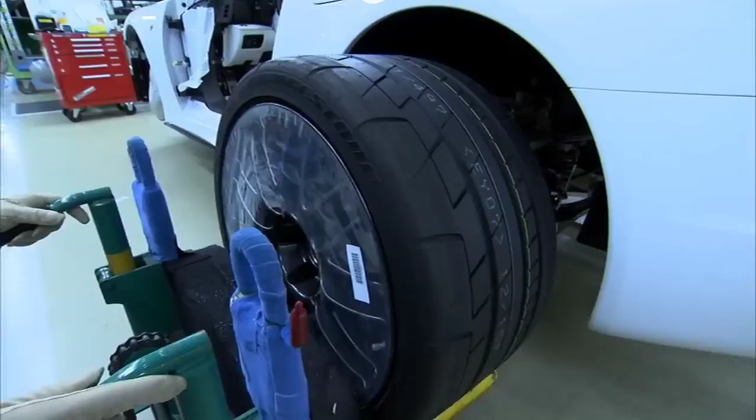Inside this top-secret megafactory, a car like no other is taking shape. Craftsmen hand-build what they consider an automotive work of art. Money is no object. This machine must redefine a billion-dollar brand. Failure, not an option.

Japanese marque Lexus sells itself on luxury, marketing its cars as elegant, quiet, high-tech, and efficient. Now, a different kind of car wears the Lexus badge, the LFA. Aggressive, loud, agile. Highest revving V10 engine in a production car. 325 kilometers per hour. A car like nothing Lexus has ever produced before.

Lexus is just over 20 years old. The world's largest car maker, Toyota, created the brand to compete with other high-flying luxury marques, Mercedes-Benz, BMW, and Jaguar. It's worked. Lexus is now one of the biggest-selling high-end marques in the United States. But now, Lexus is out to inject more excitement into their brand. Chief engineer Tanahashi Haruhiko is the man behind this vision.

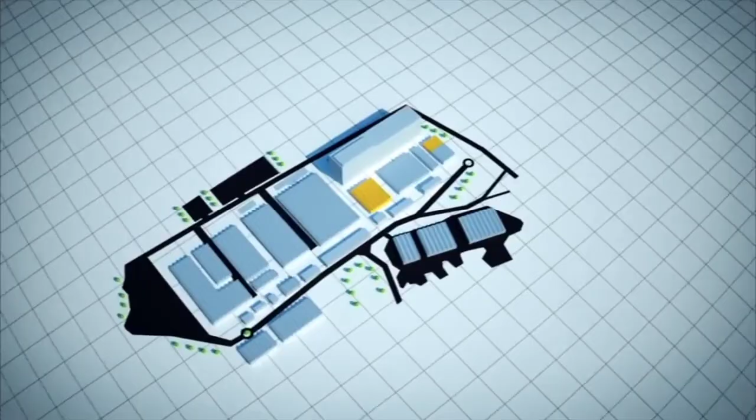Finding a factory in Japan isn't hard when you're part of the country's largest company. Toyota is so big, they even have their own city, Toyota City. Of the company's 15 Japanese factories, 10 are found in the city or close by. Among them, the Motomachi assembly plant. The company transformed two unassuming blocks of this megafactory to create the LFA. They then scoured Toyota's 50,000 Japanese workforce to handpick just 175.

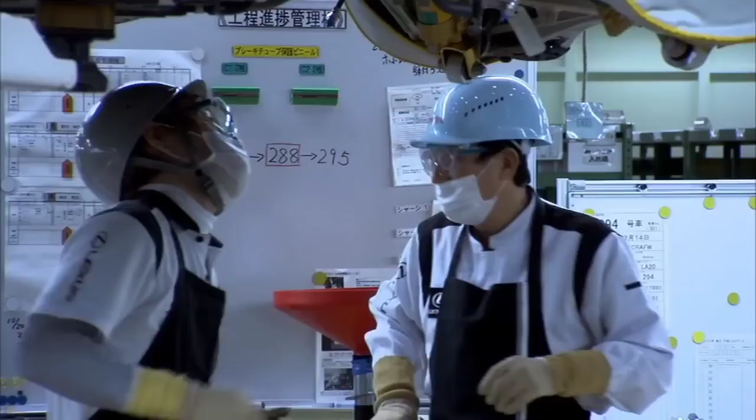All the associates here at the LFA Works feel they are artisans, not just operators. These artisans are known as takumi, Japanese for craftsmen. A status only conferred on the most highly trained, skilled workers. Each and every associate at the LFA Works is seeking to achieve perfection, taking this challenge on with a sort of samurai spirit.

Yamanaka Shigeru is manager of the LFA Works. His teamwork credentials come from another time-honored Japanese tradition: baseball. Before this, I was working as manager of the Toyota Motor Corporation baseball team, which brought people together from lots of different factories. It was because I could manage that organization that I was made manager here.

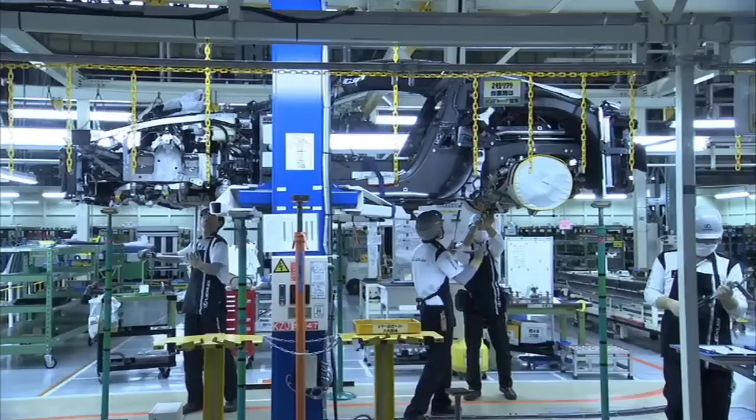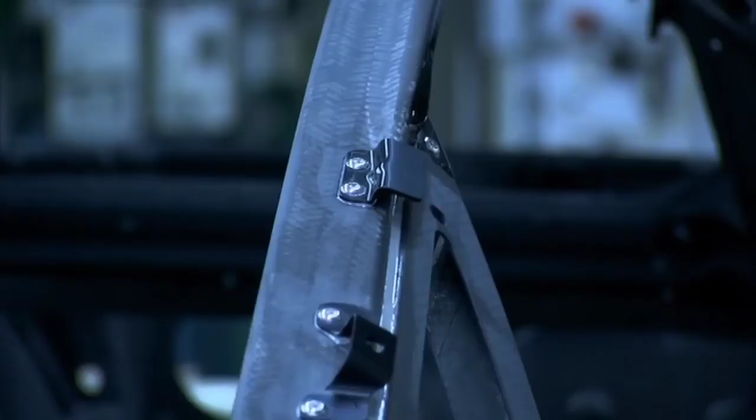To reach their goal, this tight-knit team utilized sophisticated tools and materials to build their car. The most important of these is carbon fiber composite. Carbon is crucial to the car's performance. It's a material 5 times the strength of steel, yet a quarter lighter. It's the construction material of choice for both Formula One racing cars and the aerospace industry. The company even make their own carbon fiber here on site. Up until now, no television cameras have ever been allowed inside this top-secret facility.

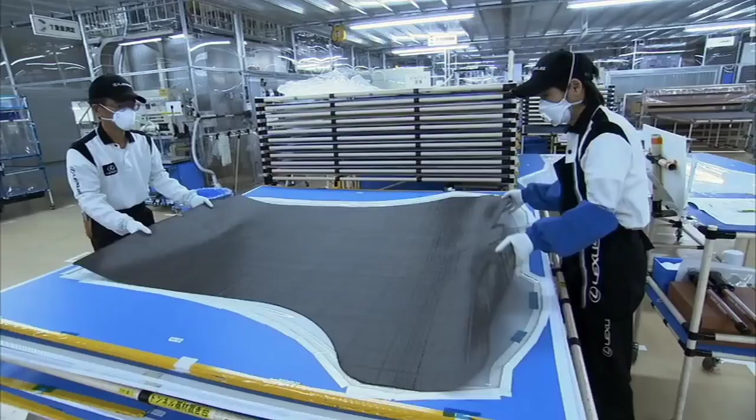First, simple strands of carbon fiber are woven into a pliable cloth using an automated weaving machine. This fabric is then transformed through heat, pressure, polycarbonate resin, and labor-intensive techniques into the car's core known as the tub. The tub is pieced together like a 3D jigsaw. It starts with the construction of the floor. To make it, precisely cut carbon fiber cloth is lifted onto a mold.

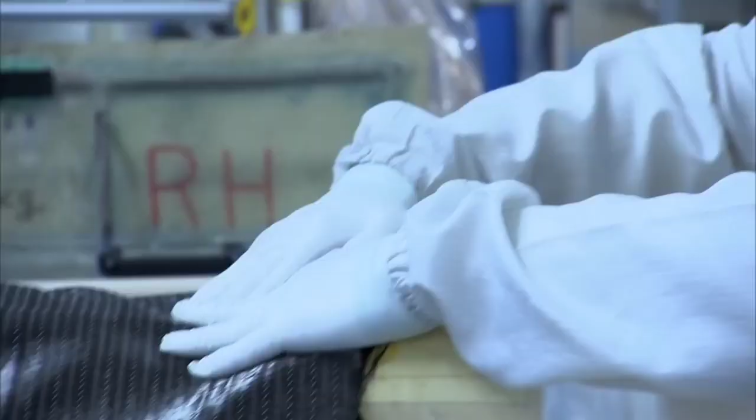Next, skilled takumi smooth the supple fabric over the mold. This one is for the transmission tunnel that will house the drive shaft and exhaust. In very complex areas like this, the fabric inevitably becomes frayed and not very neat. The associates work with these areas as if working with silk, taking great care every day. They also wear masks to avoid breathing in the hazardous fibers. In the beginning, the associates found it very difficult to work this material. It was much easier when they used an iron.

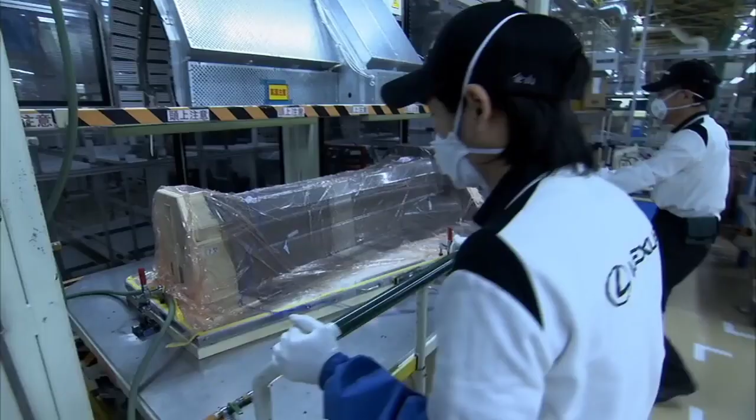The completed part is briefly heated to set its shape. It's then fitted into a template, along with 7 other floor parts, and inserted into a 1,000-ton press. A glue-like resin is pumped into the template, and the whole section is then baked for 8 hours at 130 degrees Celsius. Under this pressure and heat, the resin sets hard, binding the individual parts together to produce the car's floor panel.

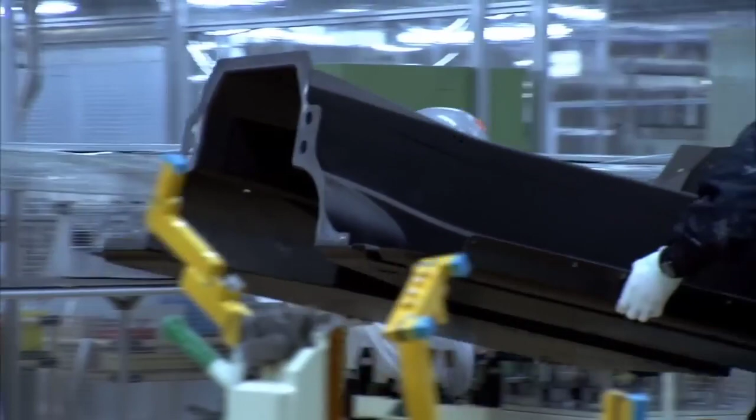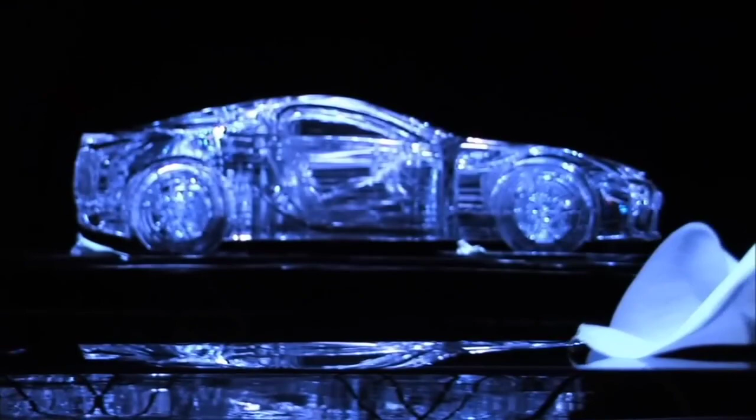Back in 2000, the concept of a world-beating supercar only exists in one man's head. At the company, I talked to just a small group of people at the top, not expecting anything, and they said, go ahead and try. With permission to proceed, Tanahashi gathers a team of engineers around him, and they start to make the basic engineering decisions. In the beginning, we planned to make the body from aluminium.

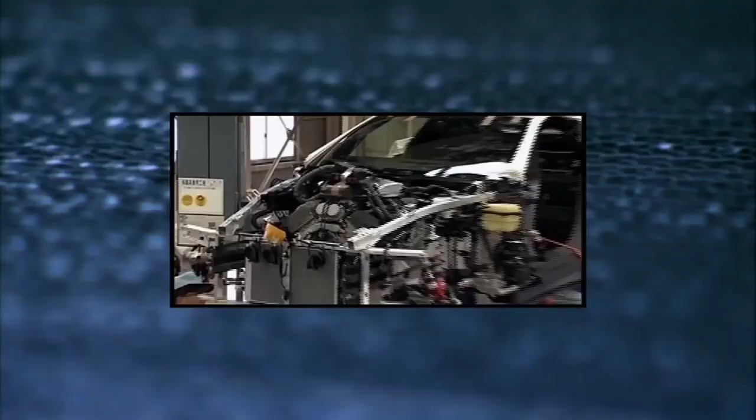But Tanahashi is fascinated with the possibilities offered by carbon. Developing a supercar, a super sports car, carbon fiber was a material I really wanted to try using, if at all possible. But this wonder material has its drawbacks. It's expensive, and the company has never used it to build any of their cars before. Despite these significant challenges, Tanahashi gets his way.

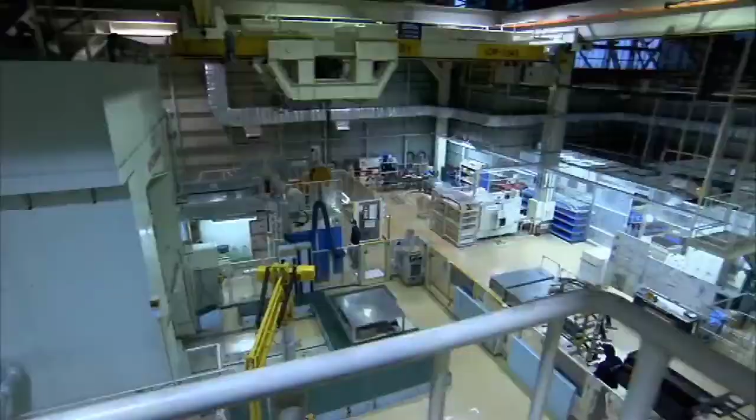In 2005, my boss said, why not go for carbon? Slapping me on the shoulder. And I made the decision to go for carbon then. It's a bold step. Everyone involved with this project must master a material they have no experience with at all. It was the first time the workers had touched carbon, and everything about it was difficult for the workers.

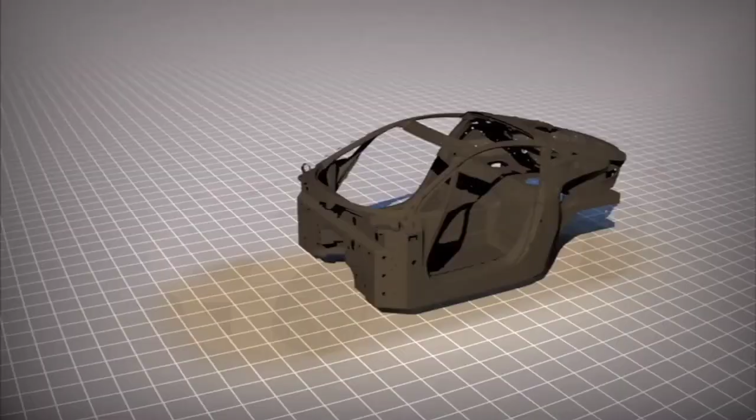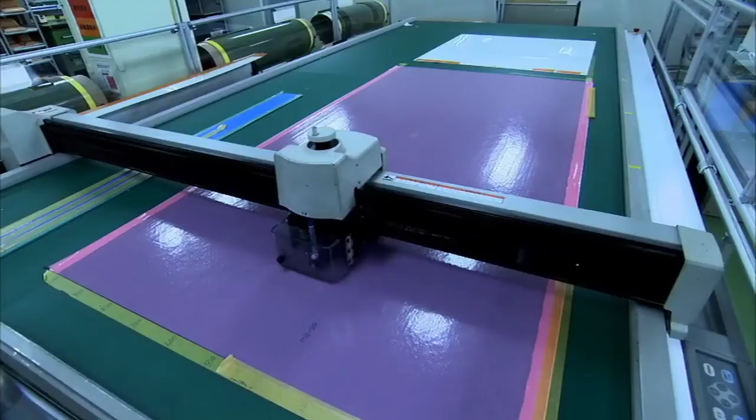In the state-of-the-art carbon fiber facility, the Takumi are returning from lunch. They vacuum themselves down to remove any foreign particles before entering a highly confidential sealed room. Here, the majority of the tub's central frame is created using the most intricate techniques. In this process, an automated laser cuts out hundreds of individual shapes from carbon fiber cloth that's been pre-impregnated with a sticky resin.

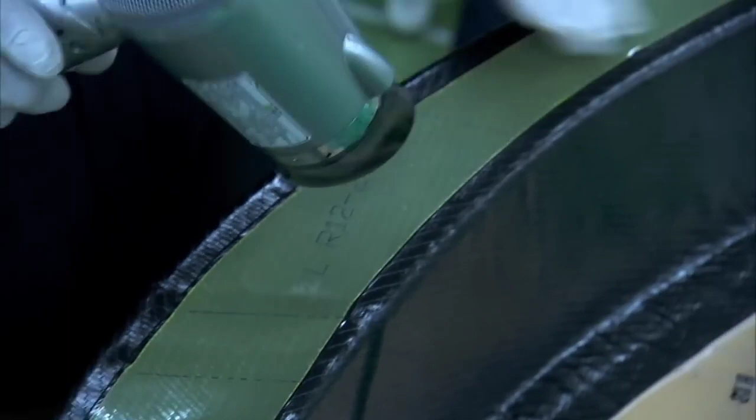Next, Takumi layer the cutouts, up to 20 sheets deep, onto a mold. This one will make the right side panel. The associate uses a dryer to raise the temperature of the laminate and half melts the resin as he applies it. The tacky cutouts stick to each other and any gaps are squeezed out using a vacuum bag that forces them together.

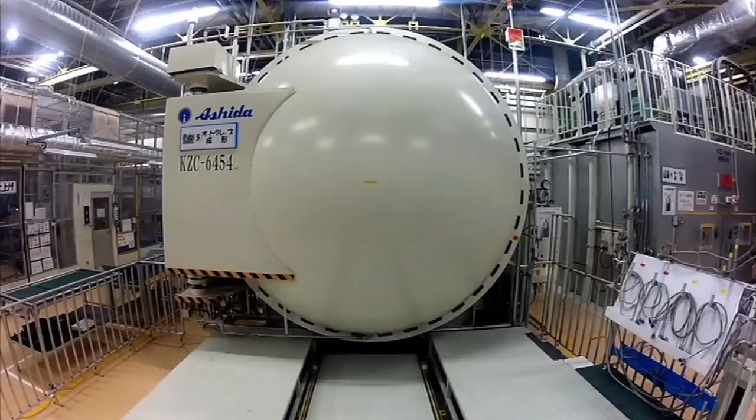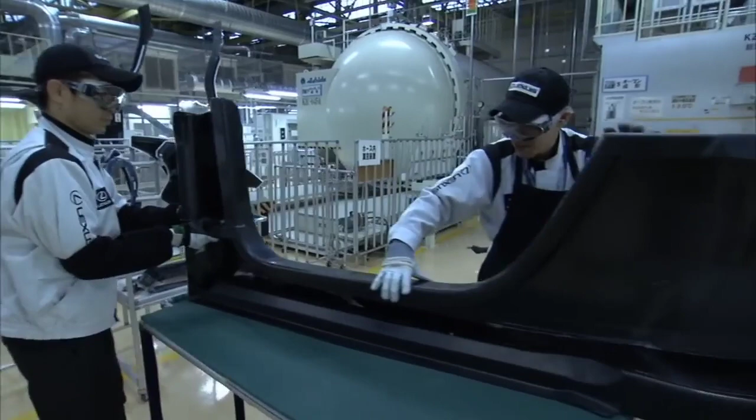The shrink-wrapped side panel is then wheeled across the works and loaded into a pressurized oven. Baking overnight at 150 degrees Celsius sets the resin, resulting in a side panel that's both ultra-strong and ultra-light. An aluminium equivalent would be twice as heavy. Weight saving is the holy grail for all auto engineers. Less weight and more power leads to increased acceleration, and speed defines a supercar.

The body of the LFA is 65% carbon fiber, helping it accelerate from 0 to 100 kilometers per hour in 3.7 seconds. If made of aluminium, it would be 100 kilograms heavier, like having a sumo wrestler in the passenger seat. As it is, this car weighs just 1,400 kilograms all in.

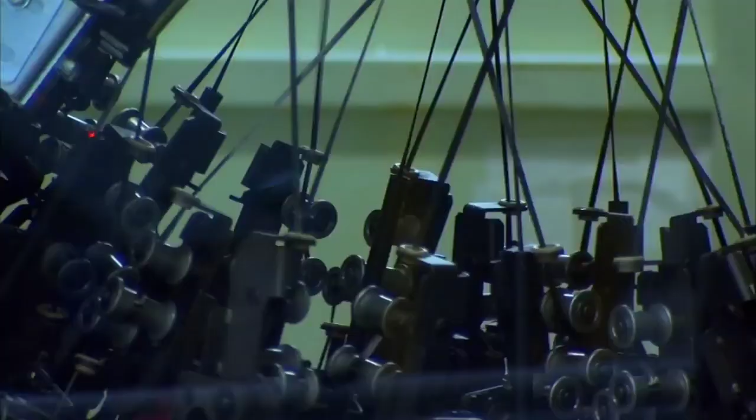Back at the factory, in a locked room, a bespoke machine creates two crucial parts to complete the tub's construction. The roof rails support the windscreen, as well as protecting the driver if the car rolls over. This custom-built circular loom weaves the carbon rail in 3D. It uses lasers to control the feed of carbon fiber strands onto 144 bobbins. These knit the carbon around a top-secret automated template that's fed through the center of the loom. This is done twice over to cross-hatch the carbon weave, so giving the rail its strength.

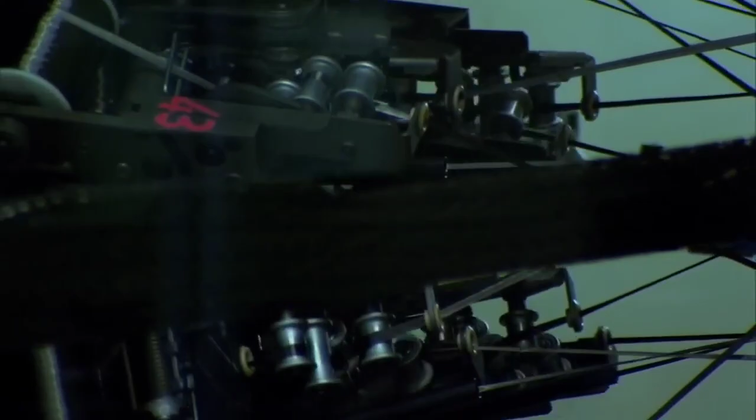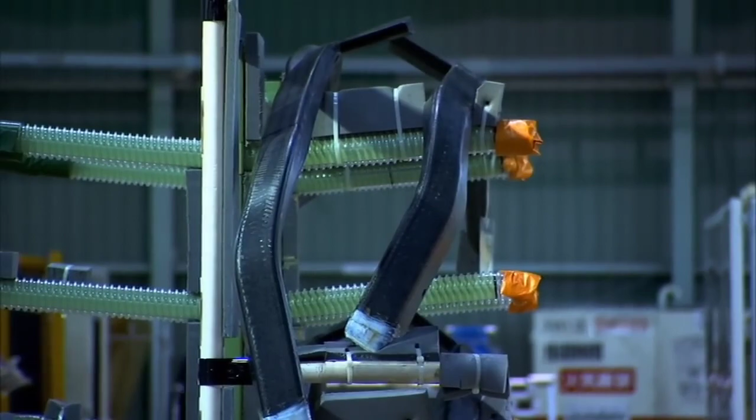The whole mechanism has its own control box, and for good reason. If something goes wrong, even a little thing, the shape gets distorted immediately, so the operator constantly pays attention to avoid this. The side rail is heated and impregnated with more resin to complete its metamorphosis from a flexible tube to a rock-hard rail. You may think that this is quite heavy, but it is only 2 kilograms.

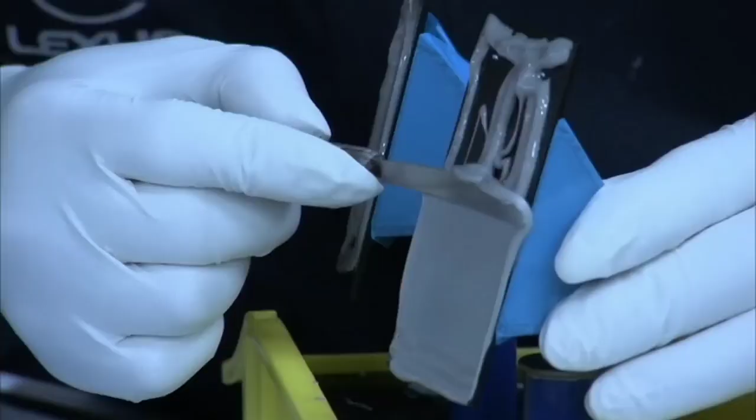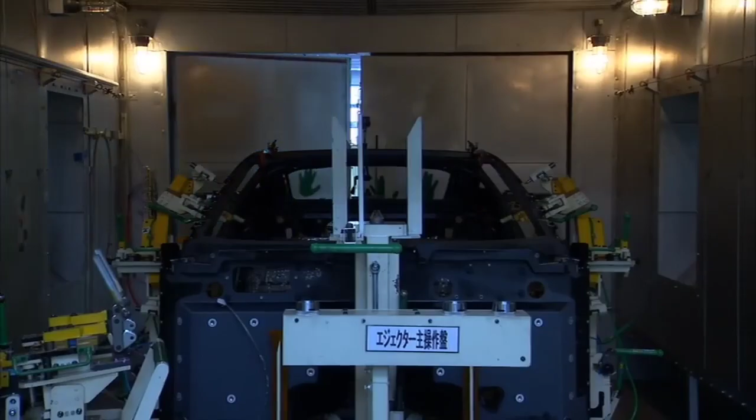The tub is bonded in another top-secret jig. First, a super-strong adhesive, known as epoxy resin, is applied by robot and hand to each of the parts. The separate parts are transferred to the jig and locked in place. Pop rivets keep the pieces aligned. To cure the epoxy, the jig is pushed into an oven and then baked for 60 minutes at 60 degrees Celsius. The resulting tub is so strong, it acts as both the structural core of the car and as a crush-resistant safety cell should the car crash.

The challenge now is for Matsumoto Kengo, chief designer of the LFA, to create a car with a body as technical as it is elegant. For us, aerodynamics, heat and airflow management should be tangible in the design. A conventional car cools its engine with forward-mounted radiators that suck cold air through a front grille. Not the LFA.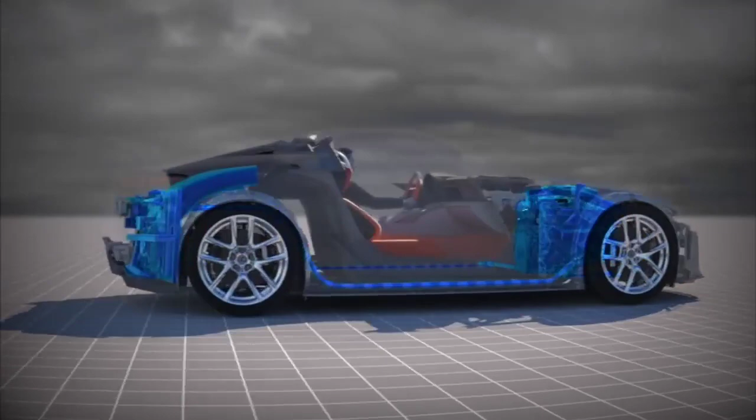Front space is at a premium, so coolant is pumped from the hot engine to twin radiators mounted behind the car's rear wheels. Matsumoto had to shape the car to funnel cold air to these vital components. Airflow management is optimally controlled by setting the angle between the door mirror and the cabin. It goes past the cabin and smoothly into the air intake for the rear radiator.

This shape is not just for styling. The intake is deliberately formed here, from the base of the glass. The result is an airflow system capable of cooling the engine even under the most extreme race conditions.

It's 8:45 in the morning at the LFA works. The Takumi are warming up for an 8-hour shift ahead. Their first task is to greet the bare cabin as it arrives from its 15-day build in carbon round the corner. In assembly, the cabin will progress through 4 positions: trim, chassis, final, and alignment.

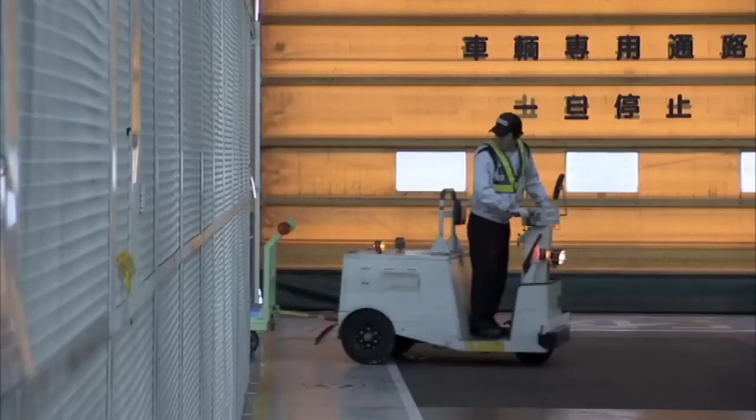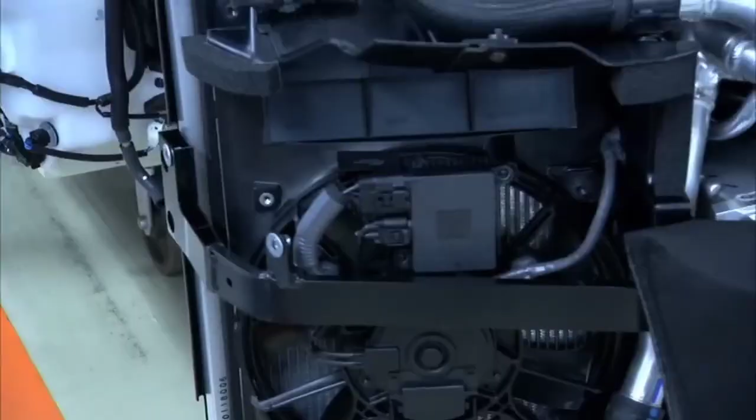15,000 parts go into making an LFA. The first of these are attached here in trim. Just meters away, other Takumi assemble the drivetrain and suspension. The drivetrain comprises the transmission, torque tube, and last but not least, a 4.8-litre V10.

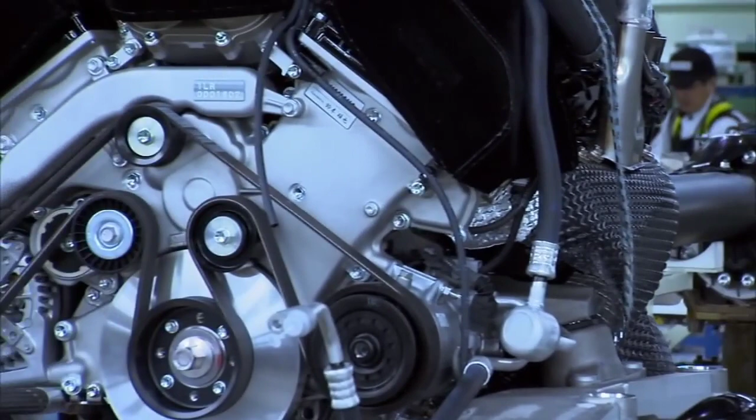The location of this engine is crucial to the car's entire concept. I wanted to build the car around the people in it. And for a supercar that puts people first, the optimum place for the engine is front mid. This front mid location puts the engine between the driver and the car's front wheels. With the transmission placed at the rear, the driver is in the center and the car feels balanced to drive.

The aim is to make the car's handling as good as possible. But a front mid configuration dramatically restricts the space available for the engine. Tanahashi has a problem. You need an engine of a certain size with a certain degree of compactness, but you want a high-powered engine as well. Tanahashi needs a small engine to fit in the restricted engine space, but he also needs the power of a large engine because power equals speed.

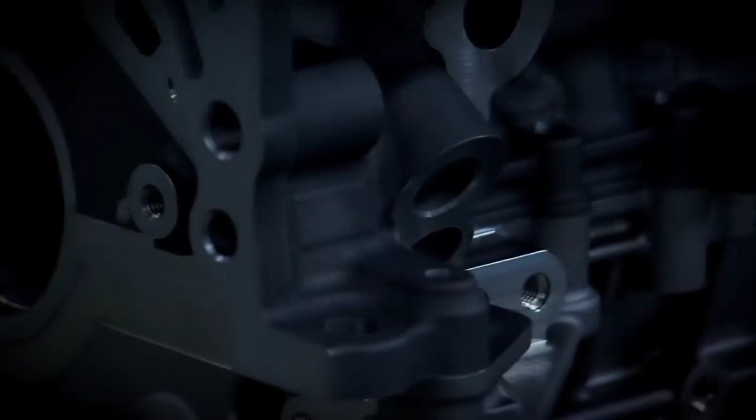And that isn't all. The high-pitched sound of Formula One makes you shiver, doesn't it? I really wanted to have that as part of the LFA. Only a high-revving V10 engine supplies this combination of power and sound, but a traditional V10 is too big for his mid-front configuration. Lexus have made nothing like this before. Their production line cars use 6- and 8-cylinder engines engineered for a super quiet ride. This V10 will be the opposite.

Tanahashi turns to some old friends for help. We are a motorcycle manufacturer. We understand power alone is not enough in a vehicle. For a sports car, small and lightweight is critical. For almost half a century, Yamaha have worked with Toyota to create high-powered lightweight engines and cars. The legendary 2000 GT, star of the James Bond film You Only Live Twice, and Japan's first true sports car, was the first fruit of their collaboration.

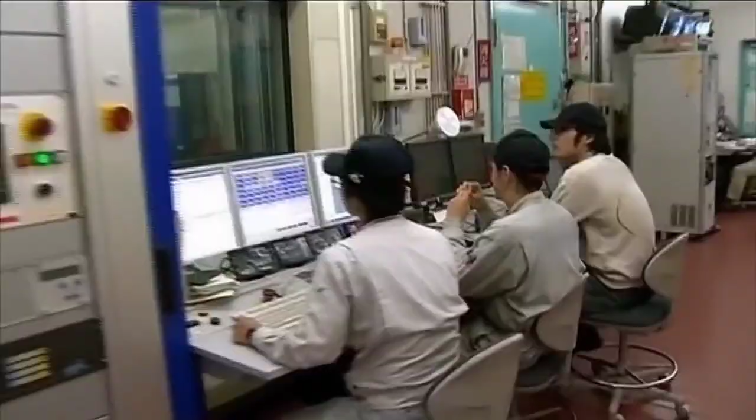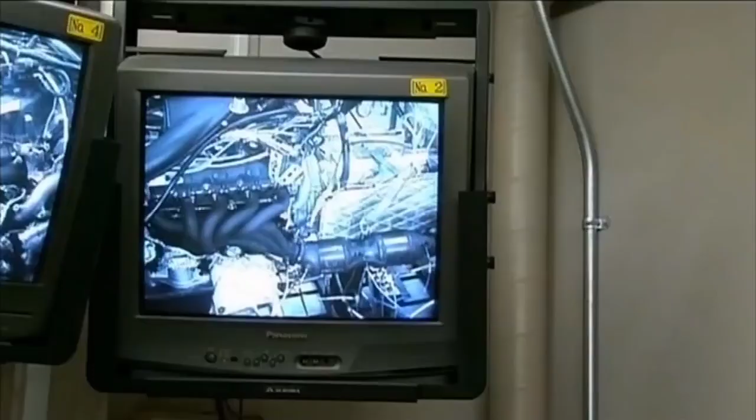Headed by Lexus engine guru Okamoto Takemitsu, the team sets itself an ambitious goal: to create a naturally aspirated V10 engine as compact as a traditional Lexus V8, with the weight of a V6. I wanted to create something different to any other supercar engine. Normally, engineers use turbochargers to boost the output of smaller engines to simulate V10 power. But turbocharged engines don't have the rapid response, acceleration or sound of a naturally aspirated V10.

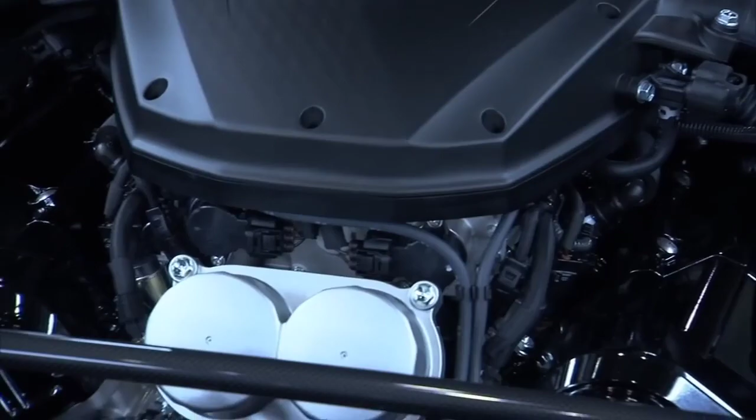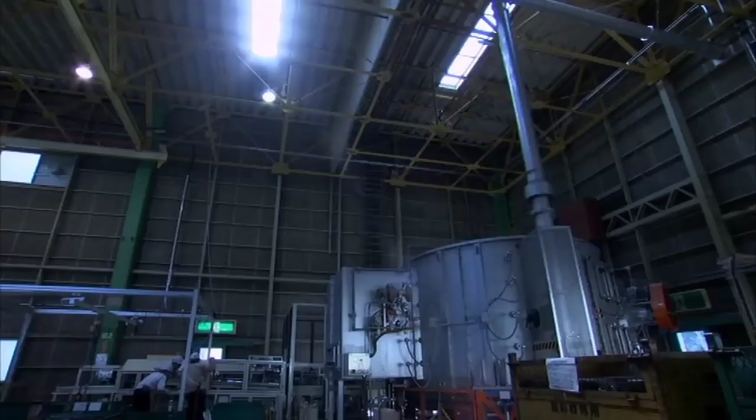By using Yamaha's motorcycle know-how, the lightest metals, and redesigning the engine's guts, Okamoto creates a masterpiece of engineering. A non-turbocharged compact V10 that fits into a mid-front design while keeping weight to a minimum. The engine starts life in Toyota's Miyoshi plant as molten aluminium.

It's cast in a 3D resin-impregnated sand mold made from 37 individual blocks that take a week to fashion. With the blocks fitted together, the mold is ready to be filled. At 750 degrees Celsius, impurities are scooped off the top of the molten aluminium.

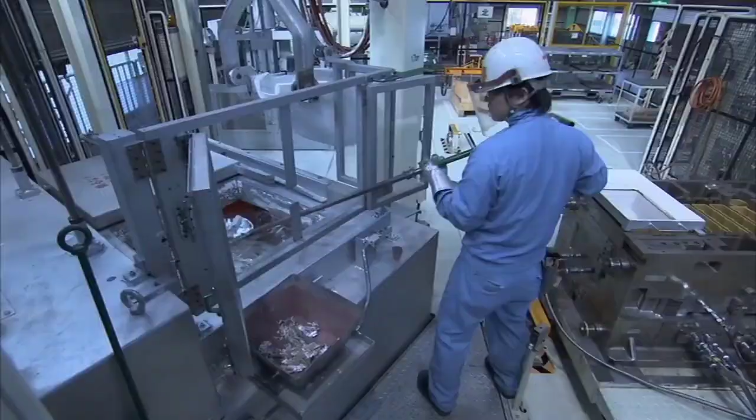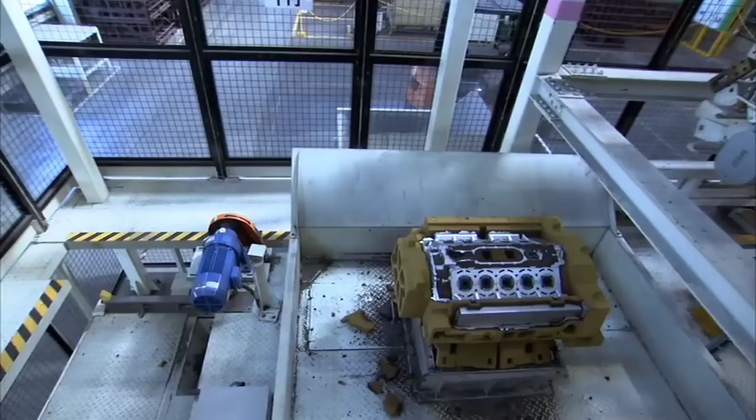The liquid metal flows into the mold as a vacuum sucks out any contaminating gases. Two hours later, with the metal set, the sand is hammered off to reveal the solid aluminium engine block inside.

It's off to Toyota City's Honsha factory and the company's highly confidential Formula One engine facility. These works are always off limits. We're going to go in. Are you ready? Come in. Television cameras have never been allowed in here before.

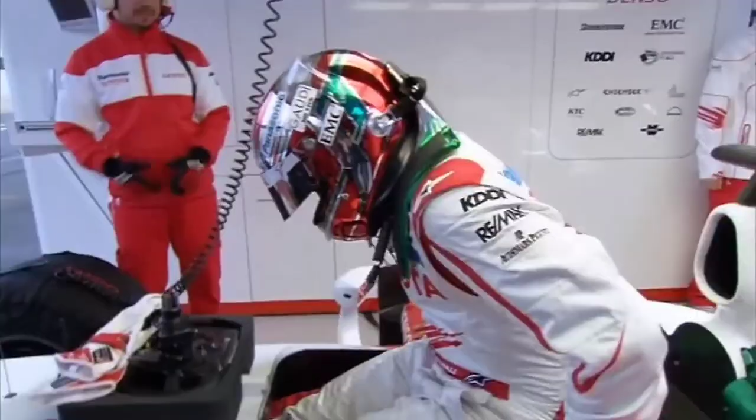For a decade, Toyota spent big competing in Formula One racing. But without a win in 139 races, they withdrew in 2009, leaving this state-of-the-art facility idle. For the LFA team, it was too good an opportunity to miss. The close parallels with F1 engine technology make this milling facility a ready-made fit.

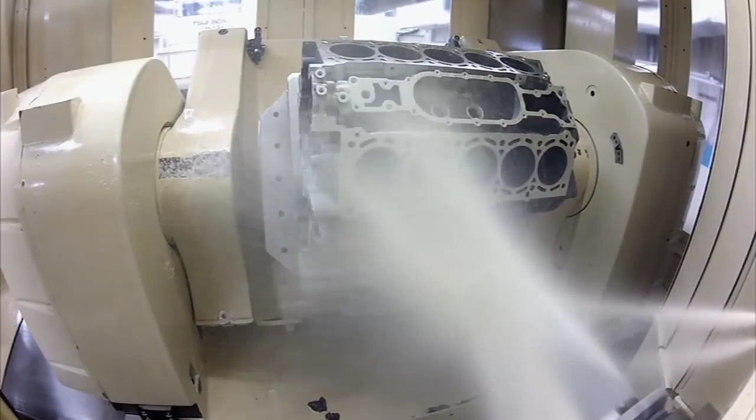In these million-dollar automated machining tools, the rough engine casts are milled, drilled and polished before emerging as precisely spec'd engine blocks. Then the robots hand over to humans. In a sealed room, Takumi hone every sharp edge using precision polishing tools.

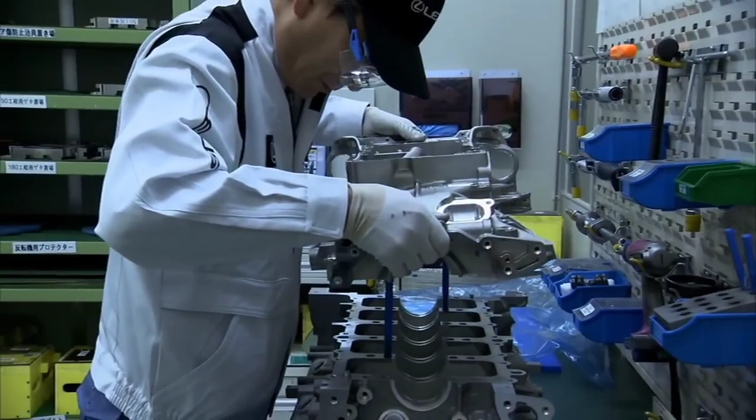Finally, a highly skilled Takumi pre-assembles the finished engine blocks to check they fit precisely. These blocks and screws are paired for life. Disassembled, they travel as a unit to Yamaha's Iwata city plant, 90 kilometers southeast of Toyota City.

The engine room here takes obsession to new heights. As you'd expect, hairnets and airlocks prevent any particle contamination. But the room is also kept at a constant temperature and humidity to ensure that every engine part is at the same state of thermal expansion during assembly. This is more laboratory than workshop.

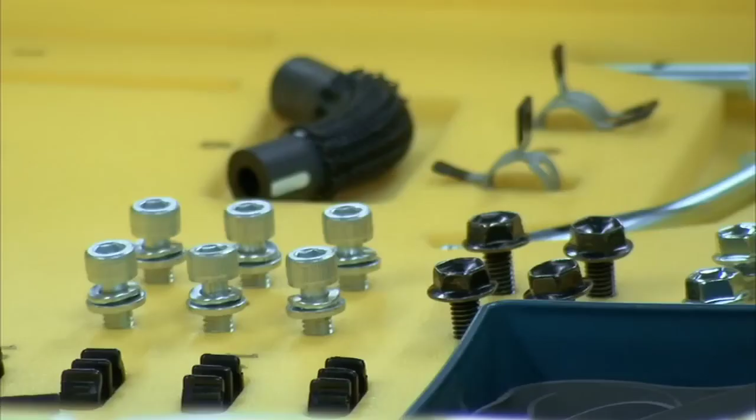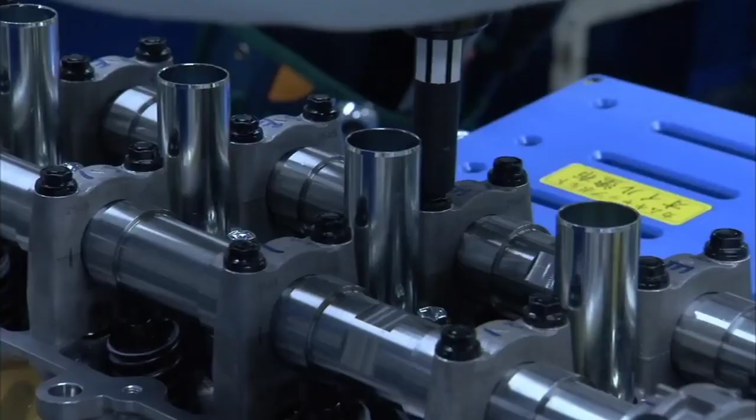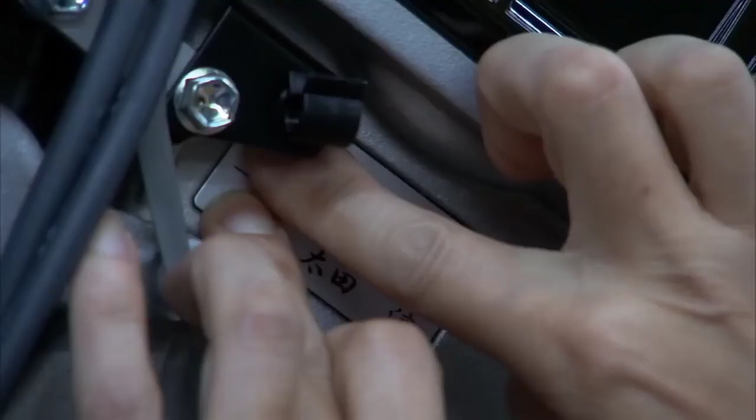The 2,200 engine parts are divided into 61 different kits for assembly by number. 4 highly trained Takumi work here. Each is responsible for a single engine from start to finish. To avoid any mistakes, they follow a series of on-screen instructions. It takes 2.5 days to complete the build of one engine. Each hand-assembled engine bears the Takumi signature.

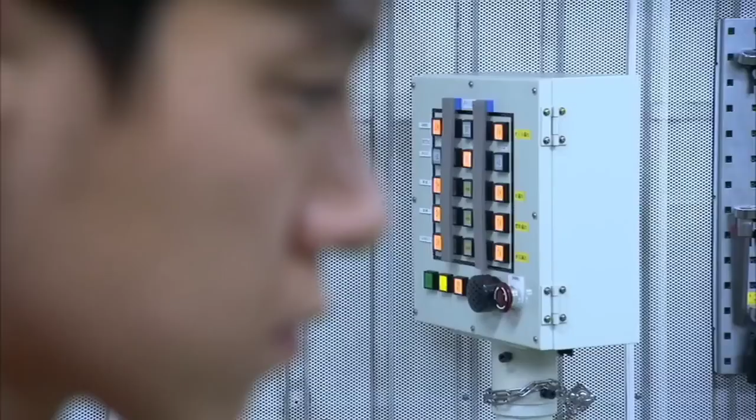Before this masterpiece goes anywhere near a car, it undergoes a half-day of exhaustive testing in the room next door to engine assembly. The resulting 4.8-litre engine is so responsive that it takes just half a second to reach 9,000 RPM. That means instant acceleration, whatever gear you're in.

This engine has excellent response and more RPM than any other commercially available engine. Response time is so fast that a digital rev counter is the only unit able to keep up. And the sound of this high-revving engine is unmistakable. The sound of the LFA is unique, and once heard, never forgotten.

To achieve the engine soundtrack that Tanahashi insists upon requires more of Yamaha's specialist knowledge. We are a manufacturer of musical instruments, so when it comes to sound technology, we have a certain level of know-how. Honji Yoshikazu is obsessed with sound.

I think the relationship between a super sports car and its driver is like the relationship between a top musical performer and their instrument. When they play in a certain way, they can listen to that sound and use it to produce another, better sound.

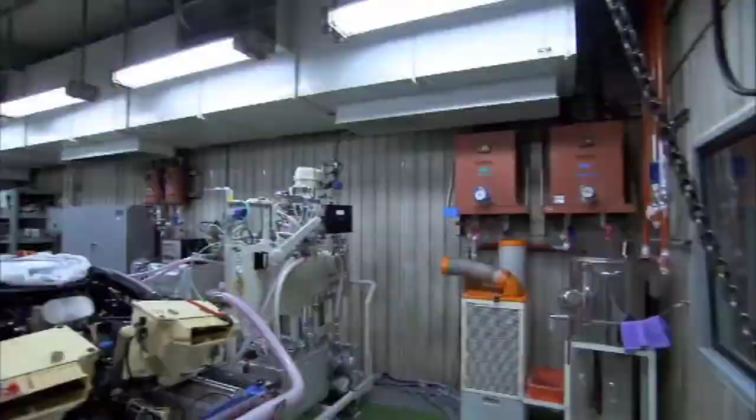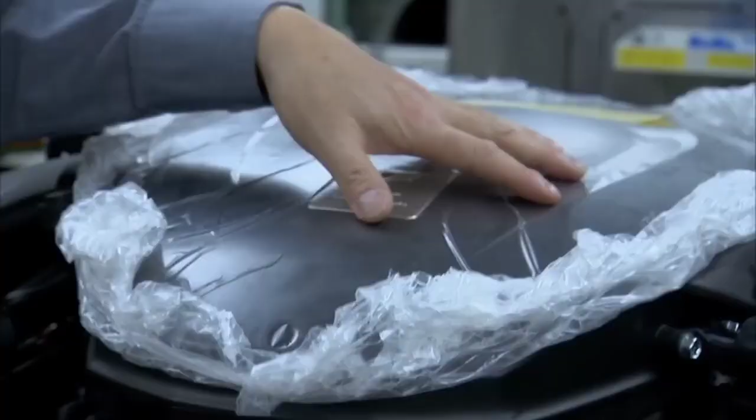To refine the driver's soundtrack, Heiji Maruyama, general manager of Yamaha Motors, had to redesign the component that sits on top of the engine, called the surge tank, by turning convention on its head. The function of the surge tank is to send air equally into all 10 cylinders. Normally, techniques to reduce noise from the intakes are used. We thought to go the other way and use it to amplify the sound, to communicate it to the driver.

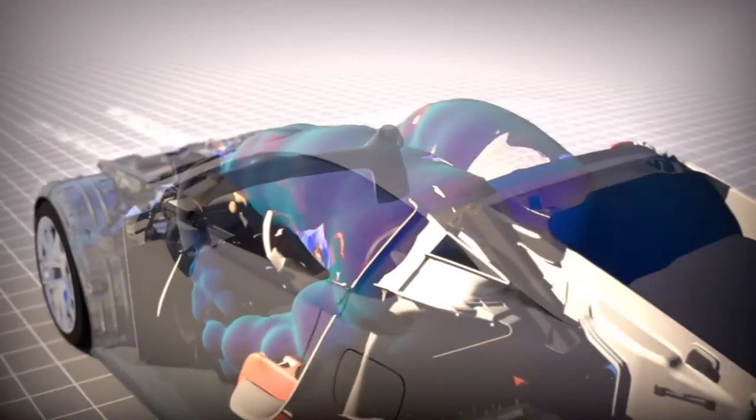Maruyama tunes the chamber by varying the thickness of the surge tank's upper surface and adding internal vibrating ribs. The construction is very like that of an acoustic guitar or violin. The team channel these good vibrations back into the cabin using sound passages. We use these to send low-pitch sound to the driver's feet and higher frequency sounds through at ear level. The driver is in the middle of this dynamic surround sound system.

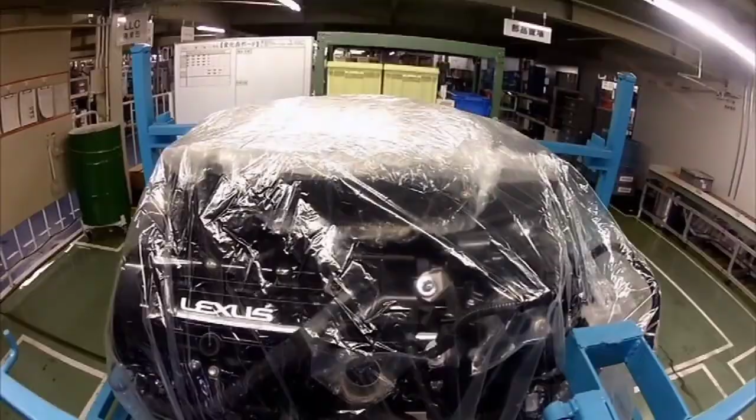The completed engine is forklifted onto a waiting truck for shipment back to the LFA works. Here, as part of the assembled drivetrain, it's inserted into the cabin's belly, guided only by eye.

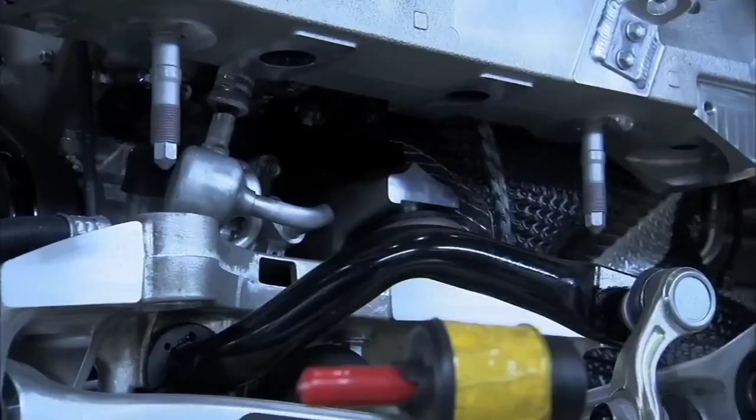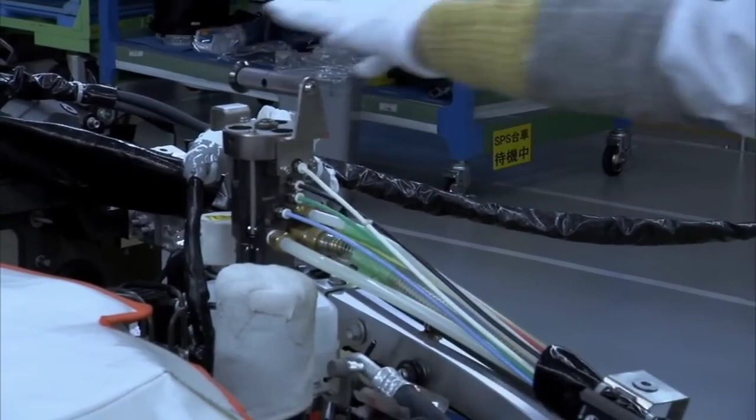With the guts of the car in place, it's time to feed them. An automated pump injects engine oil, brake fluid and coolant into the appropriate under-bonnet opening. In Japan, machines play a tune to alert anybody nearby that they're running. This one plays an American folk song. With the precise volume of fluid added, the pump stops, as does the music.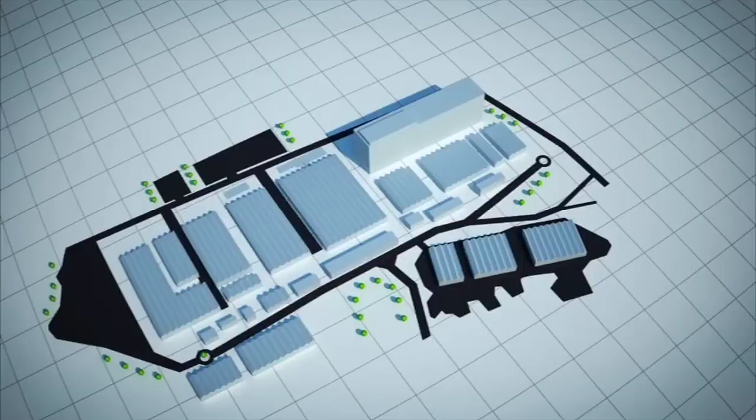The car's 9 moulded glass fibre body panels are manufactured off-site. This material is both strong and light, but far cheaper to replace than carbon fibre, should the car crash. The paint shop is under the same roof as assembly, but it's a very different world in here. At the LFA works, paint is one of the few production processes performed by robot. The company believes they give a more consistent finish.

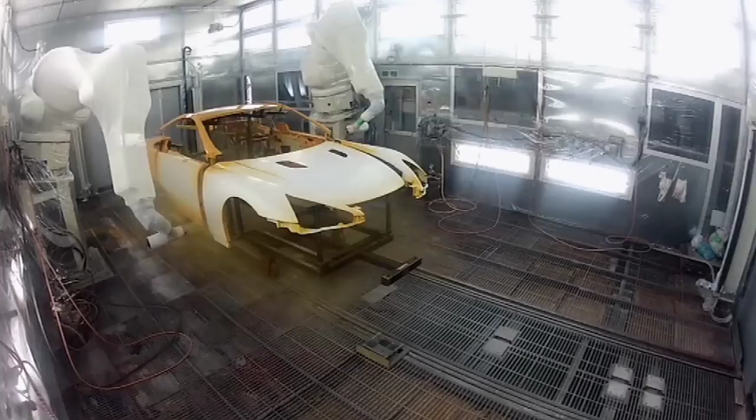But there's always an ongoing human battle in the paint department. Dust is the greatest enemy for painting. If dust gets into the paint surface, when it's heated, the dust swells up and causes a blister. So the atmosphere is controlled on a daily basis, and there's a strict dress code. Up to 5 layers of paint are applied. And where robots can't reach, humans can.

Job done. The sprayed panels are dried in an oven at 100 degrees Celsius for 50 minutes before being wheeled out for inspection. The battle against dust continues, with water nozzles spraying a fine mist into the air to stop anything drifting onto the pristine surfaces. A bright light inspector spots any blemishes and marks them up to be polished out.

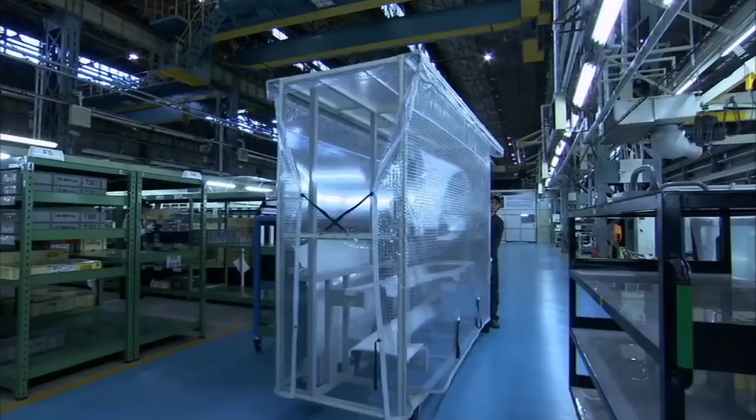The completed panels are wheeled out of paint across the factory floor and attached to the carbon tub back in assembly at the 3rd position on the line, known as final. Here, the hand-stitched leather interior is installed, and the forged aluminium wheels with bespoke Bridgestone tyres are also fitted. It looks as if the associates are performing each task very slowly, but every one of them is working very carefully and with a high degree of certainty. If you compare it to a sport, they are top players who complete a successful play every time.

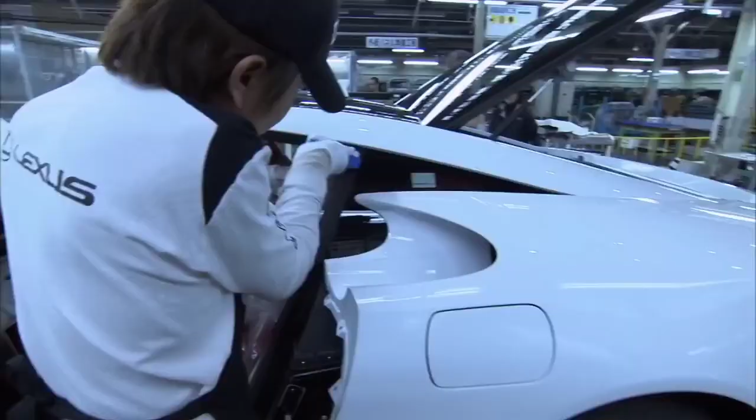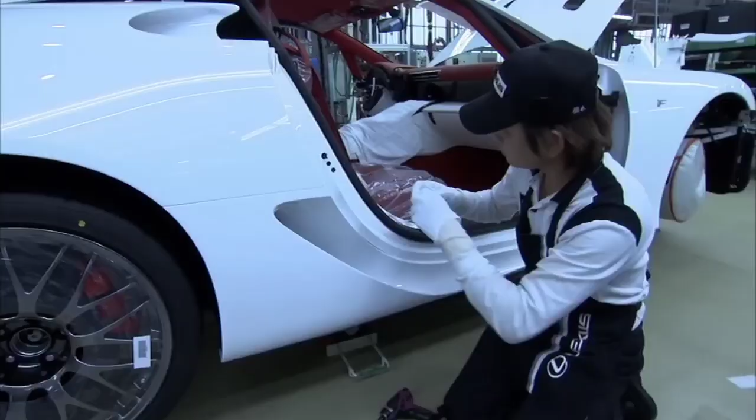The LFA works runs like clockwork, yet there's no clock watching. The reason why there is so much time is that Chief Yamanaka tells us to take our time and work slowly, so that we can make something that we know is good. How can I put it? He says that in order to ensure quality, we can take as much time as we need. That goes for overtime as well. If it means we make something good, then we can do overtime.

The only stipulation is that one car must drive off this assembly line every day. And from the beginning, Chief Engineer Tanahashi was clear that only 500 would be built. At a car a day, that will take just 2 years. And then, this factory will close. Making only 500 cars positions the LFA as a very special car. There is no plan to make any more at all. Even pricing the LFA at $375,000, the most expensive Japanese road car ever,

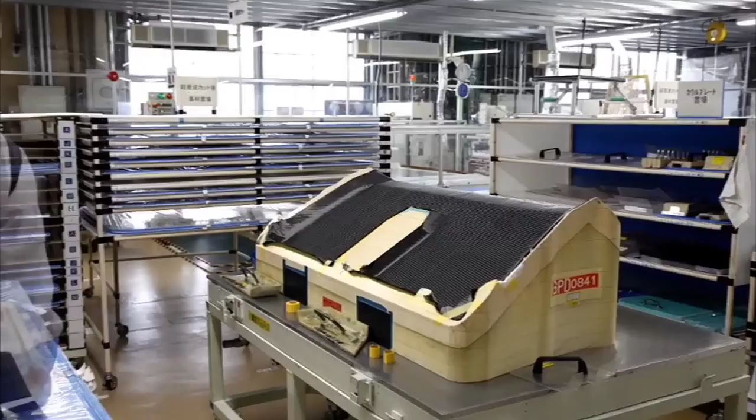a limited production run isn't going to recoup the costs of development, the use of cutting-edge materials, and unlimited overtime. I think it will be difficult to make a profit with only 500 units delivered. But by producing the LFA, the Lexus brand gains in value and is well received worldwide. I think the legacy will be left in technique, knowledge and teamwork for making cars that will please our customers in the future.

Back in 2004, with the prototype build, Chief Engineer Tanahashi takes a bold decision. He wants the car proved on the severest of tracks. Nothing in Japan fits the bill. So he takes the entire development team to the notorious Nürburgring in Germany. For us car makers, the Nordschleife on the Nürburgring is like a mecca for cars. This is where this car was honed. The 20-kilometer Nordschleife section of the Nürburgring is infamous as the world's most punishing test track.

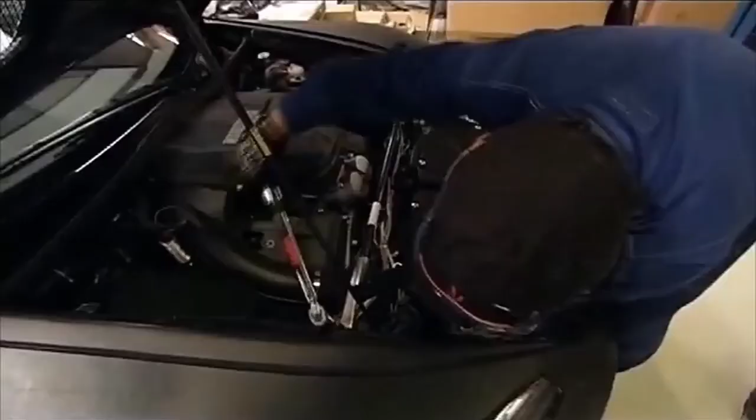For 4 years, the team tests every aspect of the car's engineering around the Nordschleife's dips, jumps, relentless corners, and flat-out straights. The car's development makes progress towards its production deadline, but Tanahashi wants to fast-track its fine-tuning. In 2008, he throws it into the unforgiving world of racing and enters the Nürburgring 24-hour race. It was purely to get more feedback on the production type LFA and to improve it under real race conditions.

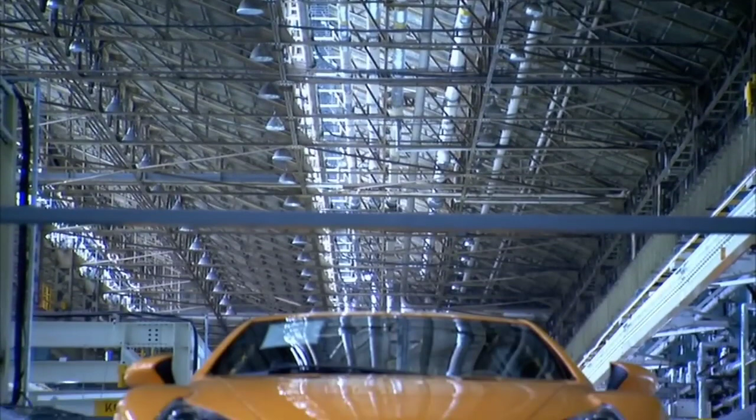The brutal experiment works. A year later, the revised car wins its class. Tanahashi is finally happy, and in 2010, the LFA goes into full production. And when in 2011, a special race edition of the standard LFA is launched, its name pays homage to the racetrack that forged it. It is with thanks to that sacred place that we called it the Nürburgring package.

This Nürburgring package has a retuned engine which pumps out 571 horsepower, 11 more than the standard engine. This extra power requires more downforce to keep the car on the track, so the rear spoiler is larger and fixed. And left and right canard fins on the car's front bumper also increase downforce. The stiffer lower suspension makes it more suitable for a life on the track.

Finally, to increase acceleration, the computerized transmission is upgraded to change a split-second faster. It all adds up to a Japanese supercar. Only 50 will be built, each with a price tag $70,000 more than a standard LFA. Back at the LFA works, in assembly's last position, the wheels are aligned to ensure the car handles perfectly. After 3 days in assembly, the car officially moves to inspection.

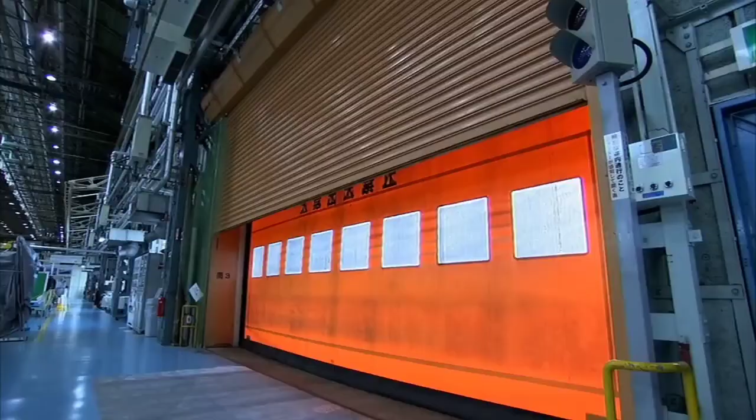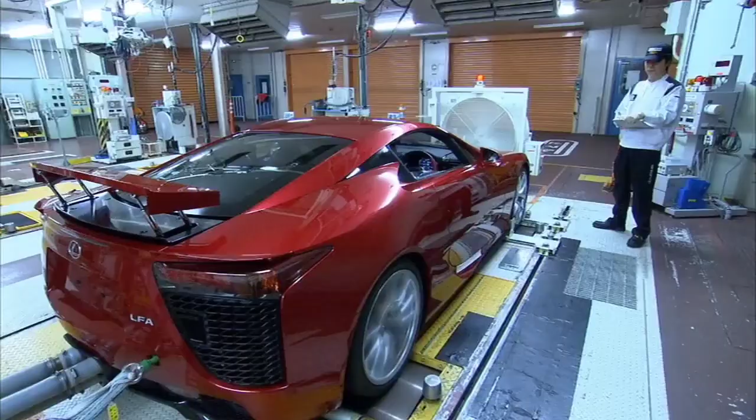With the internal and external surface inspection signed off, the car leaves the LFA works for good. It's driven through the Motomachi plant into quality control. This will be its home for the next 7 days. The checks performed here range from speedometer and brake tests to water tightness. The reports fill a 350-page booklet.

Finally, test driver Amano Nobuaki ensures each of these cars is road ready when it leaves the factory. The car is bedded in on Motomachi's very own test track. The masked sections of the bodywork are to protect vulnerable areas from stone chips. I think this is the best possible job in the world. Amano checks the car's controllability, engine sound, power, braking performance, and vibration noise on the 1 kilometer track.

There is one danger driving this car every day. Every now and again, I just want to forget the job and drive this car away somewhere to have for myself. This car is complete and ready for its owner. To date, all 500 LFAs are spoken for. No more will be sold. The Lexus brand is safe, but Tanahashi still has something more to prove.

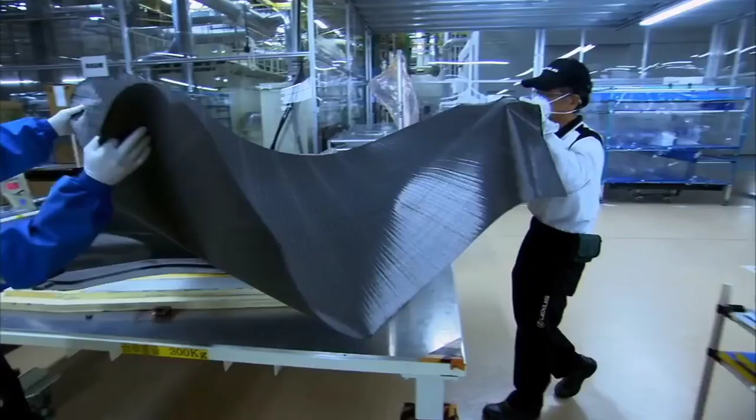This car could redefine what Lexus means to the world. We developed the LFA with a new direction, one of emotion, passion and power. This was new to Lexus. And this MegaFactory could redefine how all Lexus cars are built. We took on all kinds of challenges, and there were new production needs. I look forward to seeing the outcome of these, both visible and invisible, in future cars.